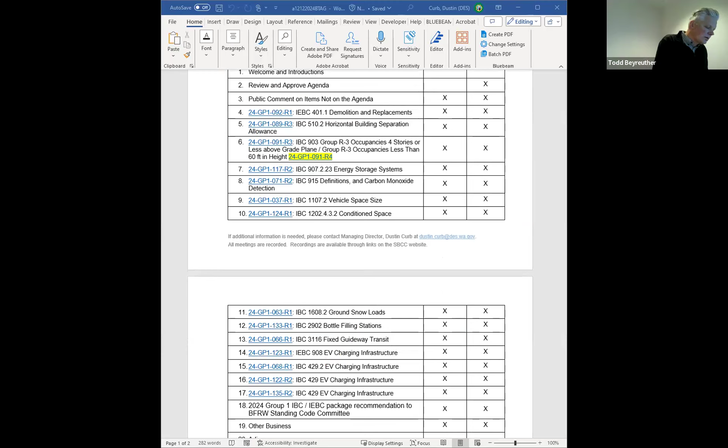Hi, thank you very much. Kathleen Petrie, King County, I'll be tag teaming again today with Ross. One thing I wanted to share is that we submitted the revisions to our EV proposal for IEBC number 123 on 12/8, and it was not posted in the agenda, only the original was. So perhaps we can chat about that when the time comes. At 123, on 14. Yeah, and so we have a version of that. Yes, it was sent on Sunday, I just resent it, we didn't realize it until right before the meeting. Okay, thank you, Kathleen, we'll look at that. Thank you very much.

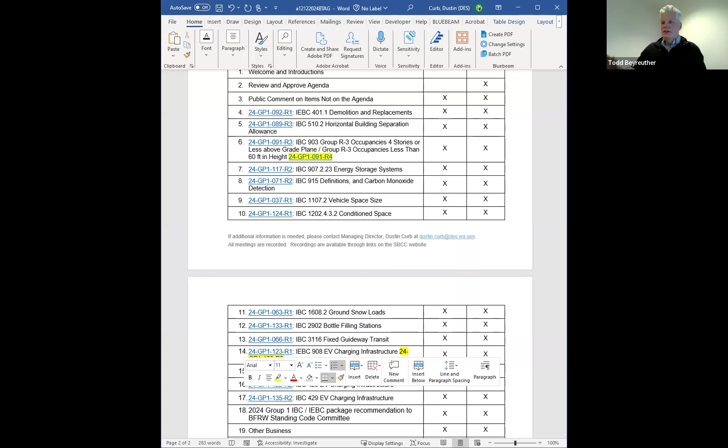Correct. And on that one for you, Todd, specifically, we made a motion to approve it, and then the intent was to bring some stuff back to chapter 35 on that one. And the motion on that one, as I have it recorded, is that we review the addition of the chapter 35 stuff at the review of the whole package. Are there any others that are in that category?

I've got one more on there. There was one that staff was asked to revise just to correct some formatting issues. Off the top of my head, I have to get in here and look at the spreadsheet. I think we can probably wait till we get there, but everyone be ready, and then that's at the will of the tag of what you want to do on any of those edits in that final package.

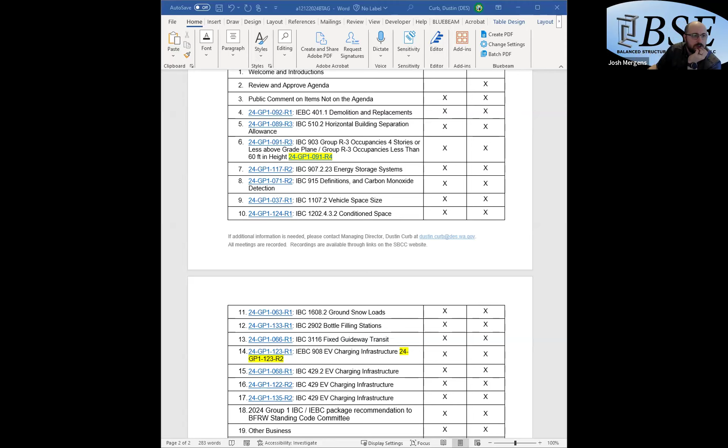There it is. So there were some questions before why we had 401.2 on here. I included it because both these provisions are in one WAC, so there's no changes to that top portion. It's just that they were both in the same WAC, so I included them in the proposal. If that's not appropriate, it can always be changed, but that answers one question.

The bigger question, though, is what was the intent of 401.4 from the original WAC, and have we really addressed anything? The main concern was we saw this language, effectively demolished by damage, and the concern was, what does that mean? What is effectively demolished? How do you enforce language like that?

So I tried to clean it up the best I can. Some folks had questions about what the intent was, and overall, the more I'm looking at it, effectively what we've done is nullified this WAC and brought it to just what the IEBC would have you do anyways. So that's starting to make me say, okay, hold on, that's just undoing the WAC. That doesn't make sense.

So what was the WAC trying to accomplish? I gotta be honest, I'm not fully figuring it out. What I think was intended is this was for the scenario some of us are familiar with, where people will demolish everything but one wall and then replace a building and say, hey, that's a remodel. There's a whole world of people doing that to get out of various requirements. And I think what they were trying to get at was, if you're doing that, the whole thing needs to meet new code, including its foundation, with an exception that the foundation could remain and be reused where approved by the code official.

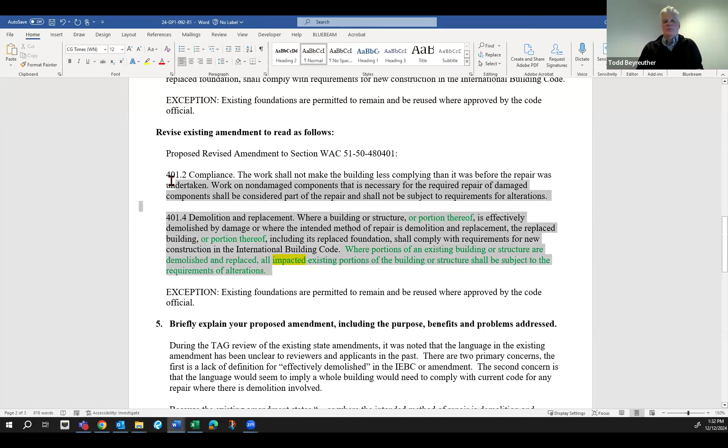So I would make the motion that we repeal the WAC language, make a reserved section, and recommend that for full adoption to the council. I second that. Okay, thank you, Josh, and then Hoyt. We'll wait for it on the screen, but any discussion on that motion?

So the motion would be to recommend this petition, as amended, shown on the screen, for adoption by the full council. I know that sounds funny, but everyone understand what we're doing? Yes, there is that exception below from Dustin too. Thank you.

Okay, so I trust Josh and Hoyt that captures your motion and second. Yes, that's correct. My motion, yeah.

Okay, go ahead, Mike. I just did a quick search back to the spreadsheet that Dustin had mentioned, and we actually did have a discussion about repealing 401.4 when we were doing the reviews of the current amendments. I know Dustin said he can't pull his up, but it looks like he has kind of a long paragraph written in that 401.4 that essentially says this WAC amendment requires compliance with building code. The quick part is it suggested repealing existing state amendments. Well, it is - I would say we've done proper public process.

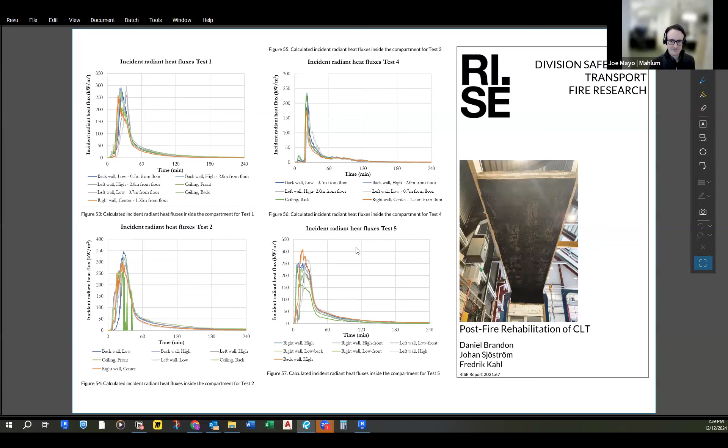As part of that study, they've actually published a post-fire rehabilitation of CLT report as well, getting at the question of what happens if there is a fire and how do you repair the CLT.

five stories with stair pressurization. You could get potentially 2 more Group R levels, or perhaps an A, B, M, R, S occupancy at the bottom. I don't think you could get more than 1 level just with the depth of mass timber structural framing. Similarly for the 3A, you could potentially get 3 additional stories, or if you're not going with Group R residential below the 3-hour horizontal assembly, probably more like 2, given the structural depth of the timber members needed.

So that was just a little background on this particular proposal. Dustin, I can pass it back to you now.

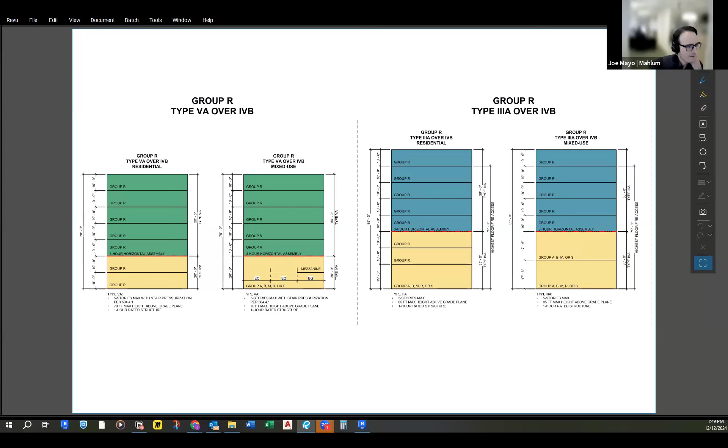I'm just bringing that up as a question, hopefully that makes sense. Yeah, that does make sense. I think we did add something in here for roofs. I want to say I might have missed it then - I read over it quickly.

So Dustin, do you want to go back to the language? Yeah, let me please stop my share.

If you scroll down, Dustin, I hope it made it back into this. Yeah, because I remember specifically thinking about that and talking about it. Did this, when this broke out into its own section, did that part not come with it? Yeah, maybe so.

It's an important point, Hoyt, that I think was intended to be included. That can get added in here if it's not already. I can't remember the discussion if, when a couple edits came from Seattle, it was determined that was unnecessary because it's already applied somewhere else, but my memory's not helping me right now. Let's come back to that and we won't forget, Hoyt.

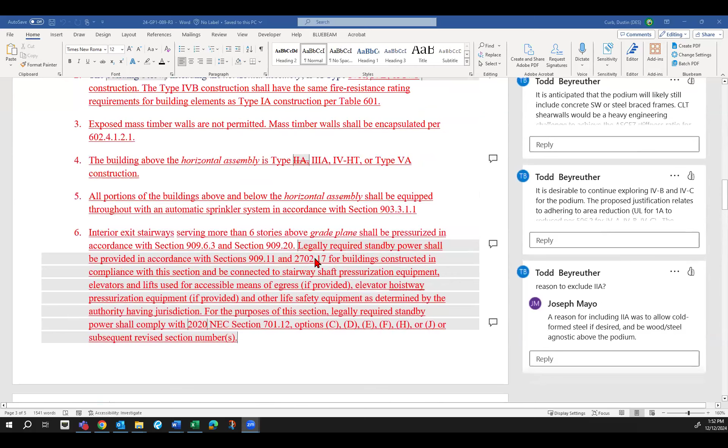The second one is the pressurized stair provision that you have in here. You have it at 6 stories. We're going to have now a pressurized stair, whereas in several other examples where we utilize the story increases, we've always kept that at above 4 stories. Granted, this is a little different, but there is type 5A construction above there, and I guess I'm slightly concerned about the idea that we have 6 stories above grade plane without having pressurization in the stairwells. So those are just 2 comments that I had to throw out there, and still say I have overall concerns about this proposal. Thank you.

Tim, if I may ask a question, can you go back down to 10, Dustin? Aren't you, so this is the same provision as the normal 510.2 with number 10 there. That's the allowable height, obviously, but you're saying you have concerns with the type 5A, 3A, or 4HT starting at that podium base at this horizontal separation, the number of stories? It's not, just to be clear, you're not saying it's not setting a type 4B number of stories on top of that podium, right? Everyone's clear on that?

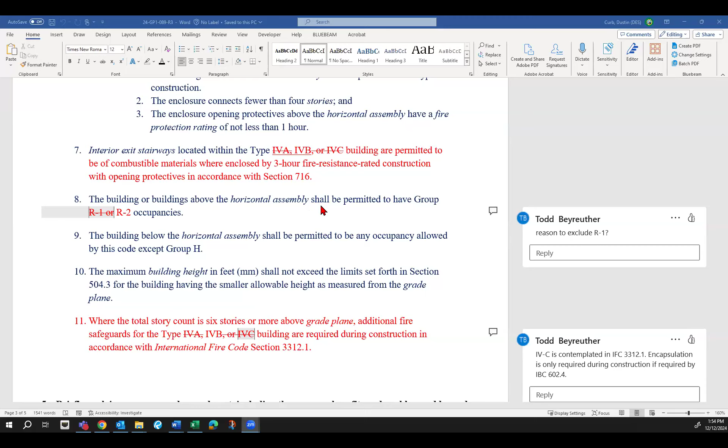Maybe I'm not clear on that. So if you go back to the very start of this proposal, it says that you can restart the stories at that horizontal separation. So now you're just saying that number 10, the building above. Right. And I asked because I was having a conversation with an architect the other day, and it got halfway through the conversation before I realized that it's not. I had to explain more clearly that the type 4B is only the bottom building, not the top building, right? Just like a normal 510.2 separation. Correct. I understand that portion of it. Okay. Yes.

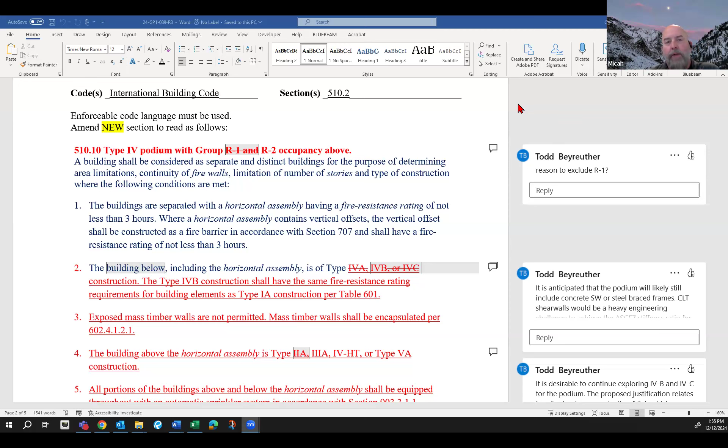Micah? Thanks as always, and appreciate everybody's work on this. I think it still has some holes. I know we're trying to get stuff pushed through and approved, or at least looked at, but maybe this is an item that needs to remain open through part of the second go round here.

A couple of things. The proposal online's kind of confusing. It of course says we're modifying 510.2, but now it's a new section of 510.10. Doesn't seem really correlated, especially with its positioning in the 510 section overall. Another part of that is, did it correlate correctly with 510.9, which talks about multiple buildings above a horizontal assembly, with these new or added provisions?

And then just on the proposal itself, again, it's repetitive compared to where 510.2 stands, and a little confusing in that. But we've got a double number 7 here, and your second number 7, if you want to scroll down a little bit. John did some review on this. Sorry, he can't be here today, but he indicates this is not necessary. You can maybe modify it, but 602.4 talks about how it's already clear that type 4 construction is not to include stick framing or FRT.

So it doesn't necessarily make sense to reduce the protection for stair enclosures. What we're getting at is that 602.4 already allows mass timber non-combustible framing. So once you eliminate all the other combustible materials in item 7, what's left is mass timber, which is already allowed. You could almost eliminate item 7 alone if you don't want to modify it. One option is to modify it to be more accurate, or eliminate it. Eliminating is probably the best choice since we all like shorter codes. But I still think there are some correlation issues with this and a lot of open questions and concerns.

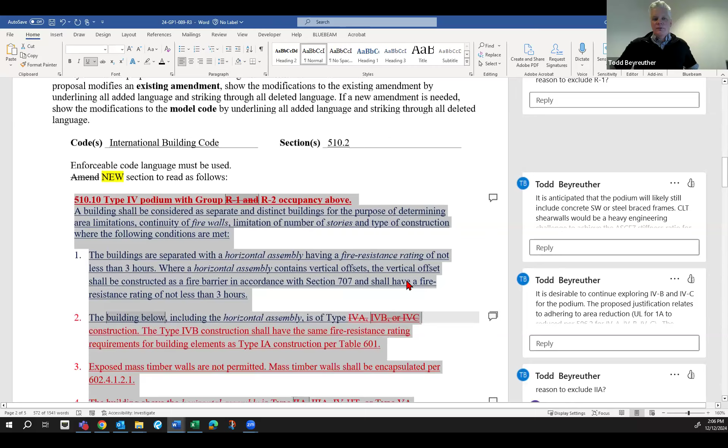We always use that informally. Hopefully it's not actually in here in that language, right? Oh, it's right there, type 4 podium. Where? 510.10. Yeah, let's cross that out then. I agree, let's cross that out. That's a good point, Ken. Thank you.

Which section needs to be crossed out here? No, just in the title that we took from a recommendation, I agree with Ken that podium, just the word podium, should be removed. I'm not the expert in code language, but for clarity, whether titles are enforceable, I think that's a valid point.

And just for clarity on this one, Joe and Todd, this language was pulled from a different section, and that's why we're showing changes here, for clarity. It was proposed that we just break it out. Remember the comment in public media, and there's an additional one in email that the exception should be longer than the actual language.

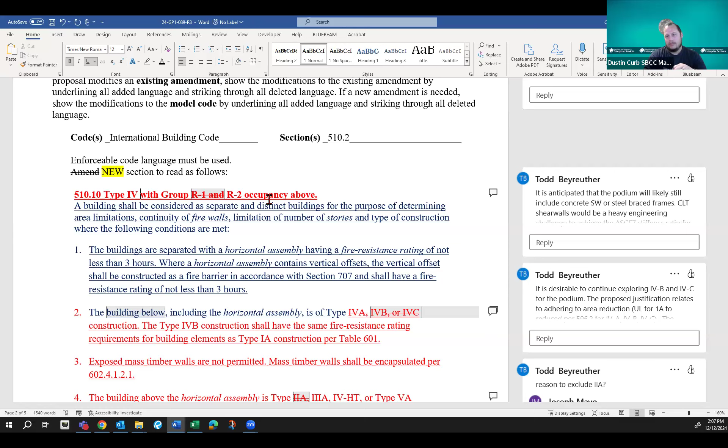So is anything shown as strikeout here that I should go ahead and remove from this proposal while we're talking about it? Yeah, you could. Remember, the whole thing of 510.10 will be a total new section. Yeah, no, these are all valid points. It's partially, this is the sausage making.

Okay, but still we need an action of something. So, Micah, I appreciate that. I don't know what our pathway is though if we don't move it forward. I guess we technically could table it, but Dustin, I don't know what process we'd be setting if we're not moving it forward in this group, to bring it back.

We are trying to close up the group, and yeah, I've been thinking about it, and we could, as a tag, not recommend this particular proposal to the committee. I don't think there's anything preventing us from taking this outside of the group 1 codes to work on a bit more outside of the timelines we're working with.

I would hope it doesn't take too much longer. I'd like to get the CR 102 drafted for the building code as one document. And if this were to hang out there until after that CR 102 is drafted and filed, there would be a little bit of a procedural issue at that point.

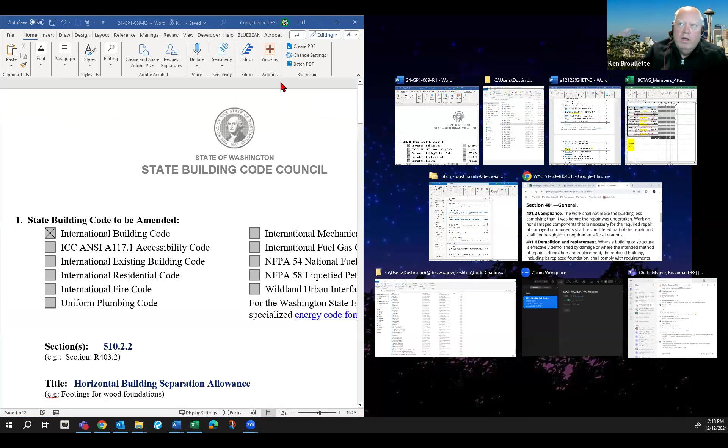Here on the left— no, I'm gonna only talk on revision 4. Okay, because I just want to bring them both up. And then on revision 4, there's one additional— I thought we caught this in the meeting, but so this proposal. Well, no, you got the wrong one up. So this one here, this is you're in 510. You want— oh, I'm sorry. Chapter 9, so, I'm sorry. There you go. Oh, I'm in number 510 for both of them. Apologies.

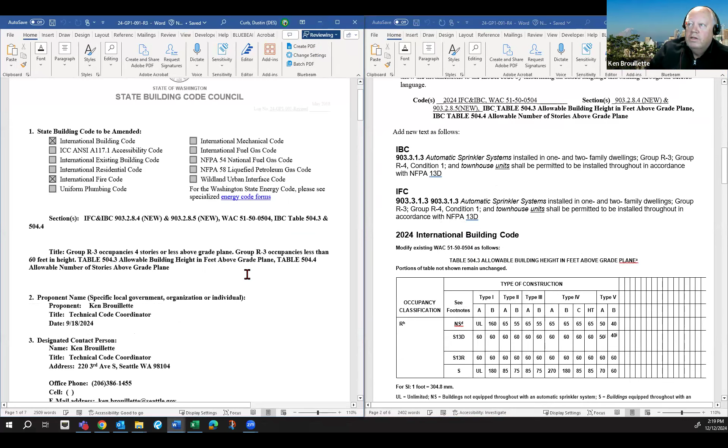Okay, so this is the one for Ken. So on the right-hand side, we have the 903.3.1.3. Can you scroll the left-hand side to the same section? I'll briefly explain what the fire code, if you can go back up to that, where it has the IBC.

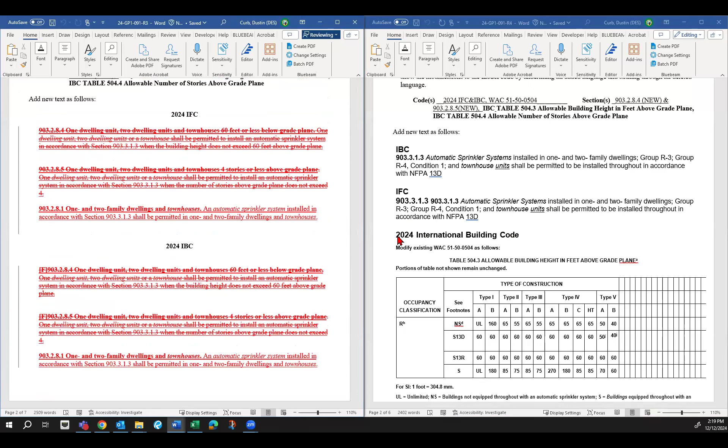So you can see what we did to the proposal is that we just concentrated and deleted out adding those additional sections 8.4, 8.5, and 8.1. We thought it was better just to look at the existing 903.3.1.3 and just make some small changes. Well, the small change was adding the word units after townhouse.

But I realized that the reprinting of this section, the 24 code says 'and townhouses.' So there's an S that needs to be shown, and then it needs to be shown struck out. So if you could do that in each one, because the 24 code has an S, and it's going to look really funny when you strike it out because it's going to look like the E is struck out too, but it really isn't. But if you could do that in both sections, that would be the minor change to that existing R4.

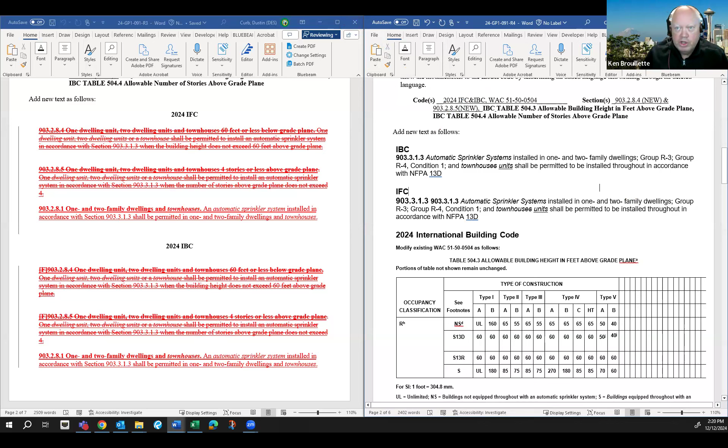And this is a clerical thing more than anything else, but the word units was just in there to clarify and to match the footnote J. So if you scroll down now to the footnote, go back up to the table a little bit. And then if you can go on the left-hand side and we'll look at the table there too.

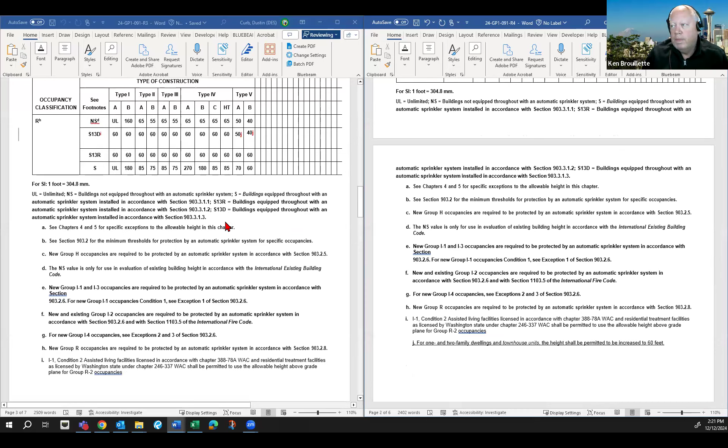And so the J got tweaked to say 'for 1 and 2 family dwellings and townhouse units' to correspond with the 903.3.1.3 change. Shall be - I'm sorry, I was reading 2 screens. For 1 and 2 family, the height shall be permitted increase to 60 feet instead of how we had it on the left-hand side with just townhouses. So we just wanted to make sure it was clarified it was townhouse units.

And then the same thing then in 504.4. Scroll down to there. So we entirely deleted out the 13D section. It was more appropriate - it was thought by everybody who was at the tag meeting and the fire code tag to just have the J footnote next to the type 5 13D system there, and then also in the R3 under type 5A and type 5B construction. And then you have the same footnote below J in that table.

And again, just changing it to for 1 and 2 family dwellings and townhouse units. And then we eliminated the section on the left-hand side that talked about fire-resistance rated construction and all those exceptions, because there's already in - and I think I still have it written down here from last week - 712.1.2, I believe is the section in the fire code or in the building code that already says that does not apply to those type of structures. So that's one reason we eliminated it.

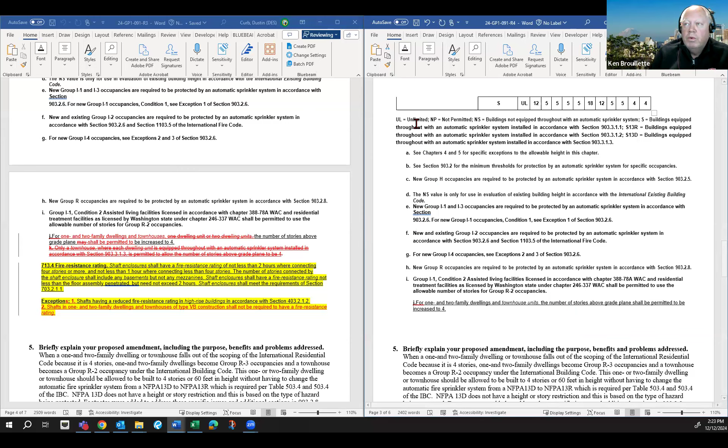So during the IFC tag meeting, it was well attended. We had SDCI, we had Ardell Jala, our building official there. Micah was there. BIAW, of course, was there, our sprinkler industry. So we went through this and approved what you see as revision 4.

With the only exception was to what we just talked about in the 903.3.1.3, by the editorial of deleting the S for townhouses and make it just say townhouse units. That was the only thing that was changed from the revision 4 that I saw, but everything else - I appreciate all the help that people put forward for this to get it through the IFC tag, and just looking for the IBC tag to correlate it so it can move forward.

Okay, thank you, Ken. We have a question from Patrick.

I was just gonna say thank you to Ken for all the work that he's put in on this and all the folks that have contributed, like Micah and other tag members. I think this is a really great proposal to address a niche case where you can have some 4-story townhouse units and lower the cost for them a little bit while maintaining good fire safety. And the fire tag already approved this, so hoping that the building tag can move this forward. Thank you. Hey, thank you, Patrick.

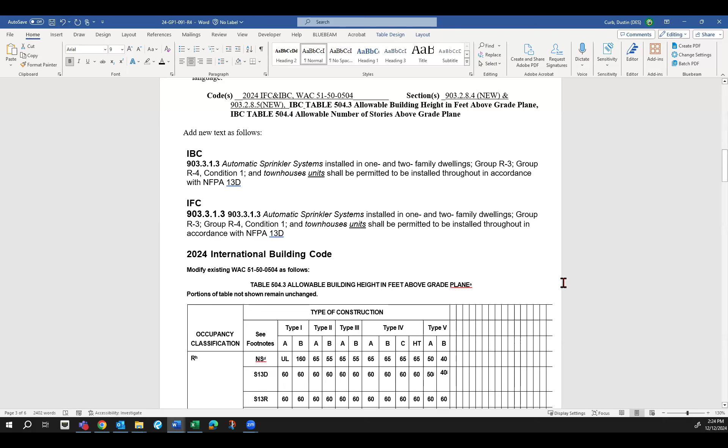Wait, no? No, I just put it down. Could you help me? You have the non-sprinkler section where you have 40, 50, 65, all that stuff.

And then you have footnote I where you go 40, 50. What is footnote I again? That's an existing state amendment I had nothing to do with. No, okay, so then J, that's the one where you're allowing it for 1 and 2 family dwelling units. Can you go back up to the table real quick?

Okay, so, why would anybody then, just asking this question here, why would anyone build a group R 13D system ever?

You mean because it's allowed? Yeah, but you could do non-sprinkler and- No, you've not got that. Look at the footnote, non-sprinkler, look at footnote D. Oh, it's only for existing buildings. Okay, gotcha. Okay, never mind.

Oh my God, I actually answered a question of Hoyt's. That's new. Normally he stumps me all the time and I'm fumbling around going, oh my God, how do I answer this question? But I got that one right. Sorry, Ken, you always get me. I always get nervous when Hoyt speaks up. I'm like, oh gosh.

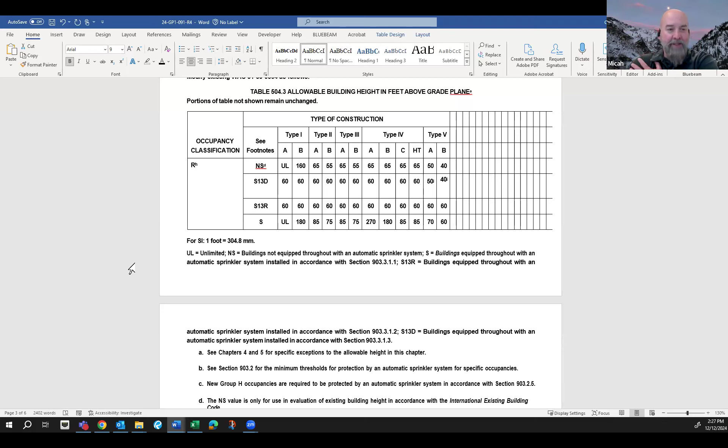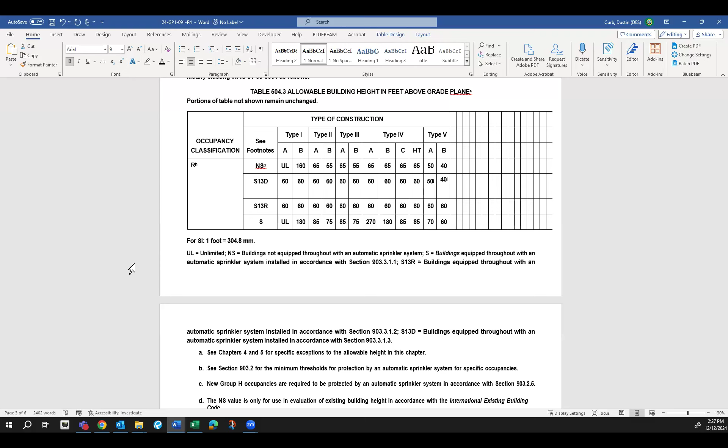Okay, thank you Micah. Okay, if there's nothing else, is there a motion? I make a motion to approve. Thank you, Mr. Hoyt. Second, Lance. Okay, thank you Lance. So it's been moved and seconded that petition 091 revision 4 as amended on the screen is recommended for approval by the full council. Any other discussion?

All those in favor signify by saying aye. Aye, aye, aye. Any opposed? Okay, with that, 091 is recommended. Thank you, Ken, and everyone else.

Agenda item 7, let's see here, it's 2:30, let's keep going. Agenda item 7 is petition 071, revision 2.

Okay, so this one also went through the fire code tag, and the fire code tag just made a change, but it doesn't affect the building code with regards to the exception, because that 1207.1 is not in the building code. 1207, I mean, the building code 1207.1, is only in the fire code.

So let me just, so I'm just trying to figure out, we got to scroll down to the building code section. And I don't think there was any change in there. I think this was more of an awareness that we took the original proposal and added in that and 855.

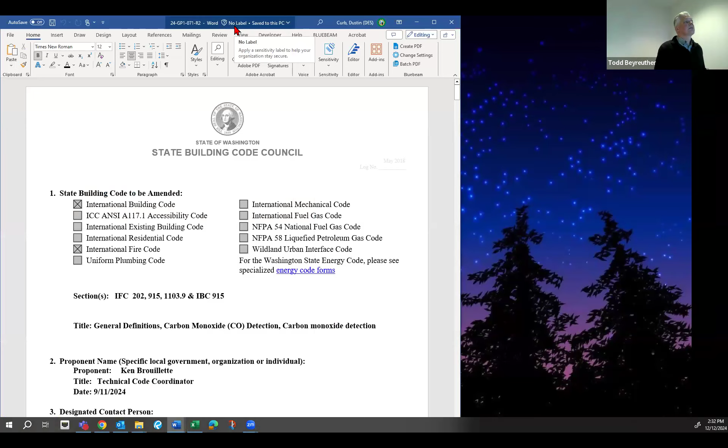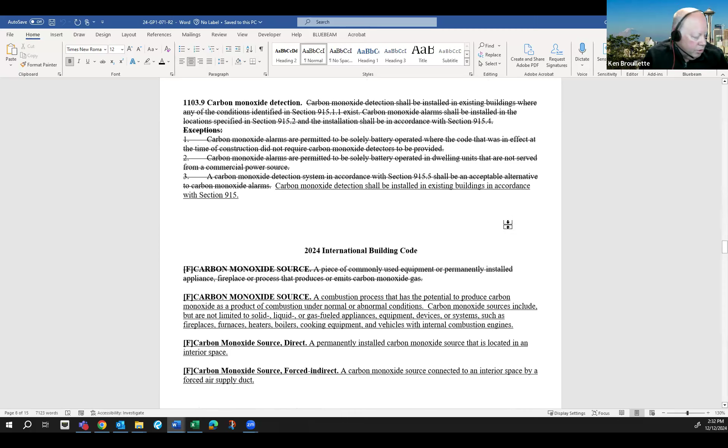This one's a Ken Brouillette one as well. So this is the carbon monoxide rewrite that was done. If you could scroll all the way down to just above number 5. This was the 2027 rewrite of this section, and Jeff Shapiro rewrote it. He was asked to rewrite it because the 24 code, as printed right now, has a lot of issues. So they decided to put together a 2027 proposal.

What we had to figure out, and John Sue helped with this at one of the tag meetings, is to look at the existing state amendment and figure out how to deal with these Group E occupancies. So what you see here is the rewrite of that section. What you don't see is there was an additional sentence that was added in that we deleted out.

I want to make sure, Dustin, it wasn't that second sentence that's showing there. This one here. Didn't we delete that at the last tag meeting? I'm just asking if anybody else remembers in attendance whether we ended up deleting that, for clarification.

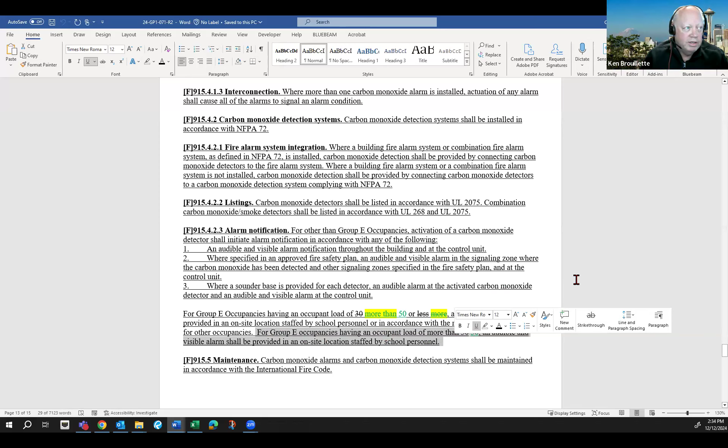I don't think so, because this is my most current revision on this one, but I can dig into it a little bit. Yeah, if we can look at revision 1, maybe. I just want to make sure.

Revision 1. I have that there, and then I have the language by John Sue here. Let me see if that matches.

So I don't know if this actually got struck out and approved at the fire code tag. I'd have to go back and watch that meeting, because when we make these modifications, you see me saving as a new revision on the fly right there. So I don't have a revision saved that has this sentence struck out.

So can I ask this of the chair? Can we table this? Since I don't have anything else to present, I'd like to be able to review that meeting and see if we did delete that section or not, and then maybe we can come back to it.

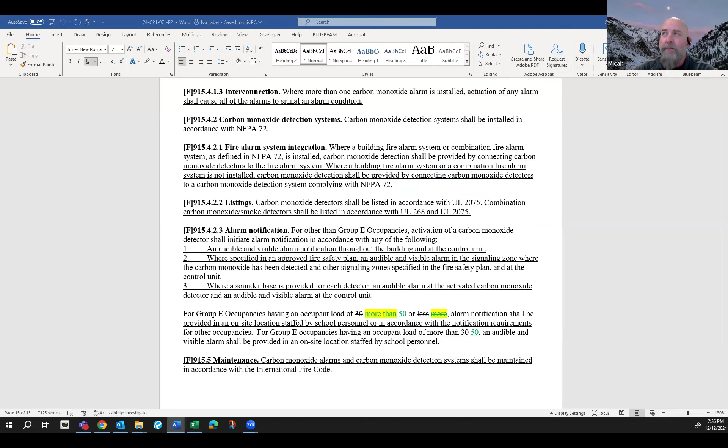It's really long and wordy. I mean, if we're going to adopt this early, maybe we should make it better. My question was about the first sentence of the definition. Again, I don't have anything to say about John's revision—John's probably 100% accurate. But when we talk about the definition, it's a combustion process that has the potential to produce carbon monoxide as a product of combustion under normal or abnormal conditions.

It's really long and wordy. My question is, is there anything other than normal or abnormal? Or, I remember you talking about this one, Micah—is there any other kind of combustion? Should it just be combustion? Should it just be a product of combustion?

Yeah, I got no problem tweaking that to make it more sense, but somebody more intelligent than me put the language together. I don't know, Jeff would probably say we should have brought it up earlier, but again, it's just not a clear definition. There were some other things, but it's not that major. You want to table it, we can talk about it and come back.

I don't think there was any comments at the national level on that definition at all when it got pushed through and approved. But I would love to table it just so I can double check that second paragraph since it has to deal with the state amendment.

Do we need a formal action to table it and move it before or after agenda item 17? Or can we just, procedurally, move on with it and bring it back? And Ken, when you're ready. That's a good plan. I'll share my screen and show the video once I get to that point. Okay, let's just pause on that one, that'll be my technical term.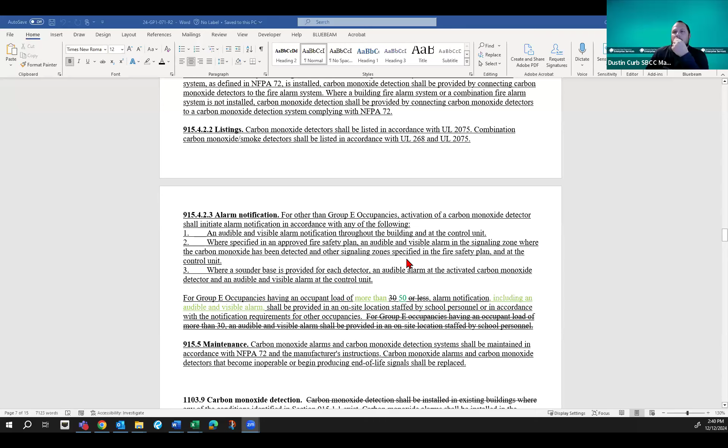So what I show here, this is the same document we just had up, but these are the sections within the fire code, and they're the same in the fire code versus the building code. Is that an accurate statement, Ken? Yeah, 915.4.2.3 is the section I was showing also. And so it shows that deleted.

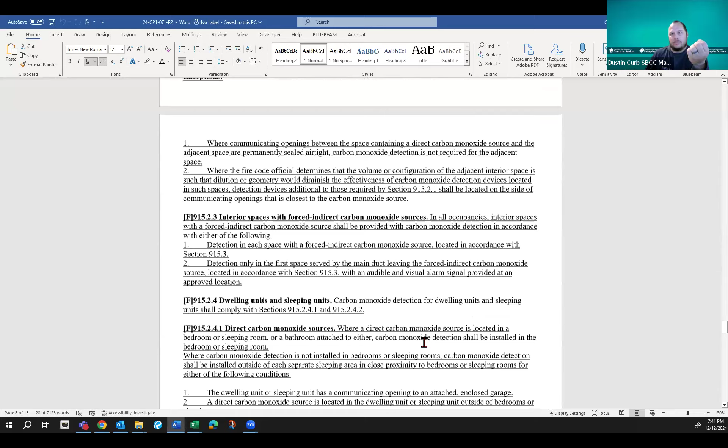Then scrolling down, we were looking at the section right above the exception statement, and that second sentence wasn't struck here. Yeah, and it should be, because it's the fire, same section. So when you were speaking about it, it rang a bell, but I didn't remember that we had a duplicate section here. So if we show strikeout, that will align with what was adopted in the fire code. Okay, thank you, good catch.

Okay, was there anything else on this proposal? Go ahead, Micah. Since we're talking about this proposal, coming back to it, question Ken, is the intent of 915 of the fire code to apply to 1 and 2 family dwellings? Let me go back up.

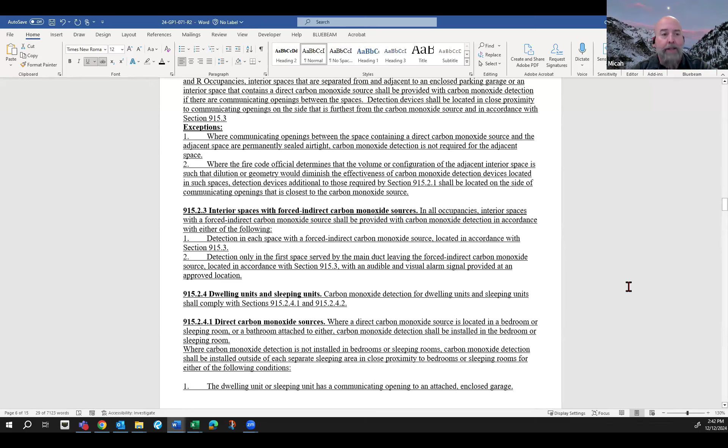I don't think there's anything, and I would just double check. I don't think anything is referenced for 1 and 2 family dwellings in here, because if they're built, I don't think there's anything that says, since the IRC already has their stuff for this. My question is, I don't see it there, specific to 915.2.4 that talks about dwelling units and sleeping units. As long as it doesn't apply to 1 and 2 family, because the IRC does have different requirements.

Since we still have that whole other group coming up, the IRC, that was going to be one of my goals, is to look at the IRC and see if there has to be any correlation done with this. And I haven't gone through as much of this proposal as I'd like.

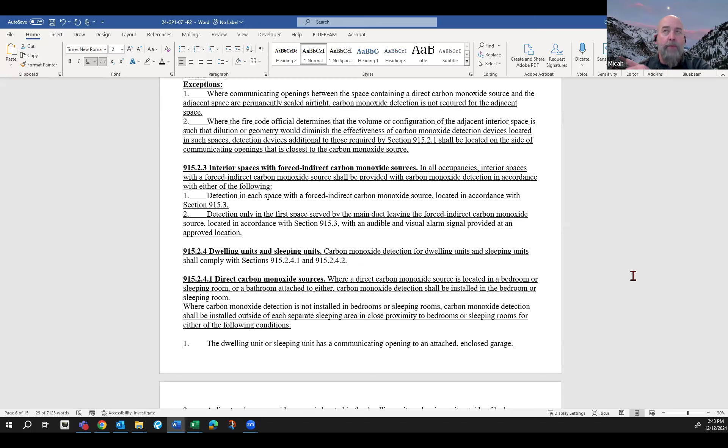Okay, wait, yeah, I was talking about Micah, and that's what I wanted, is to actually for existing buildings to install carbon monoxide ones like that. So I wanted to make sure that was caught. Hopefully nobody else's hands come up, but I don't see any. Am I correct? Because I'm ready to make a motion if I can.

I'll make a motion to move this forward to the full council. Is there a second? Do we have a second? This is Bill, I'll second it. Thank you, Bill. Okay, it's been moved and seconded that 071 revision 3, as shown on the screen. Go ahead, Tim.

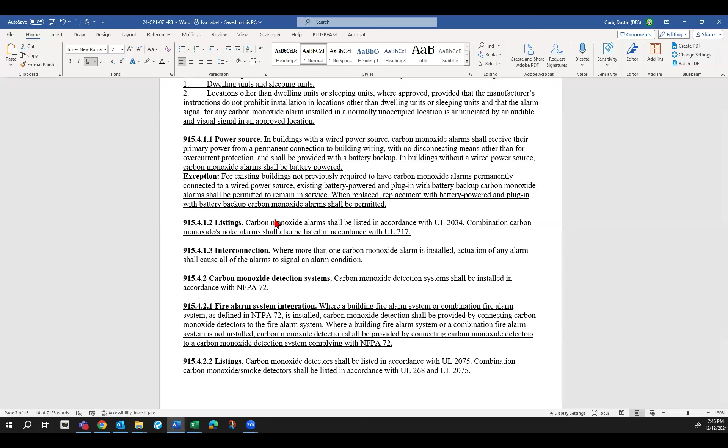Okay, go ahead, Ken. So Tim, can you explain that? Because the 1103.9 is in the fire code. So where are you seeing in the building code that it's in this proposal that it's talking about existing buildings? Because that 1103.9, it's 915.1. 915.1, okay, can you scroll up to that? Got it. So if you just wanted to, you would just strike out, you would just say new buildings shall be provided with carbon monoxide detection. Existing building code should be in the IEBC.

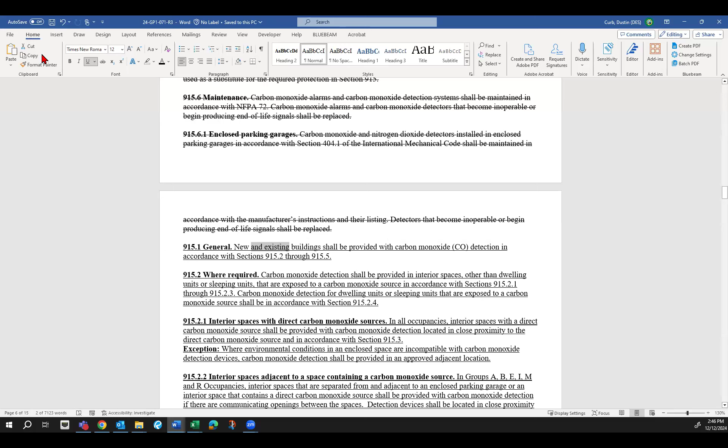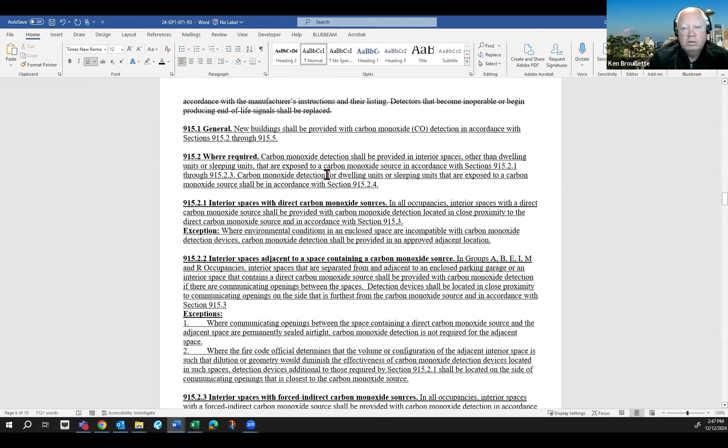Yeah, I would be fine with that strike through, because I think the fire code still would point to that and just say, hey, if you're an existing building, you got to deal with it. And I think I'm fine with that. Is there another section that's duplicated there? Yes, I'm gonna get to it here. Hoyt, do you take that as a friendly amendment? Oh, yeah, absolutely. Okay, I forget who the second was. Bill? Yes. Okay, second, thank you, Bill. Now Jeff might kill me for suggesting that, but oh well, you know, it's Washington.

We're special. Okay, now it's been moved and seconded that 071 revision 3 is as amended on the screen has been recommended for approval by the full council. Go ahead, Micah.

Ken, I got one more question on the power source correlation that you're bringing, or you're striking chapter 1103 or section 1103. I'm reading the exception for the power source for existing buildings. It doesn't seem to correlate with the current standard. The current standard said if the code in effect at the time of construction did not require carbon monoxide detectors, you could do battery operated. The new language says for existing buildings not previously required to have carbon monoxide alarms permanently connected to a wired source, existing battery powered and plug-in with battery backup alarms shall be permitted. If they're existing, you wouldn't get any new ones to be battery powered. Is that the intent? Again, it sounds like you're wanting in existing buildings, if you're going to put them in now, you have to have them wired and not battery powered.

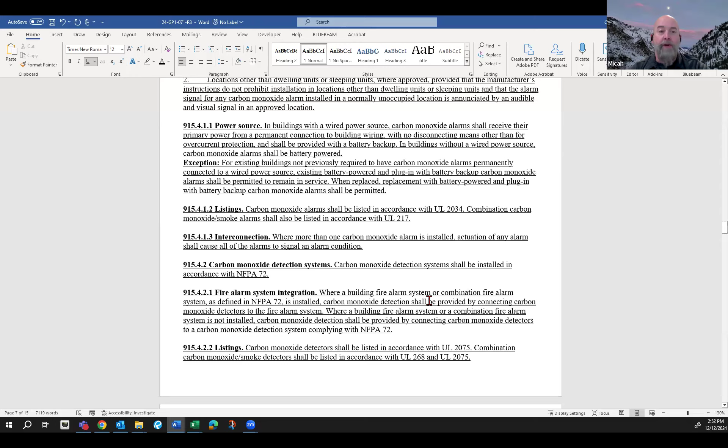This is just an exception. But if you have 1103 as currently written or proposed, 1103.9, you're striking it out and saying carbon monoxide detection shall be installed in existing buildings in accordance with section 915. That means you shall put them in existing buildings. And if I have an existing building, then I'm allowed to put in battery operated ones. And where doesn't say that?

Well, under power source, under the exception for existing buildings, if I currently... I'm not reading that the same way. And if somebody else is, let me know.

I'm reading that as if you have an existing building and you put in a new carbon monoxide detector as required by section 915, it has to be wired. It's not allowed to be battery powered.

And I don't read it that way. So, but I'm reading it like Ken's reading it for the exception.

So I'll just add that I'm also reading it like Ken's reading it for most scenarios, but picture a scenario where you add a new bedroom in, or add, I don't know, something to the requirement that's going to trigger a new carbon monoxide detector, not a replacement of an existing one, because there's no exception for existing buildings, since the exception is only if you replace an existing one.

There could be a possibility that there's a problem. In the end, I feel like that possibility is very, very slim because we only require theoretically carbon monoxide detectors outside of existing bedrooms. And theoretically, 9 times out of 10 or even 99 out of 100, it would already be in place, so you could just replace it.

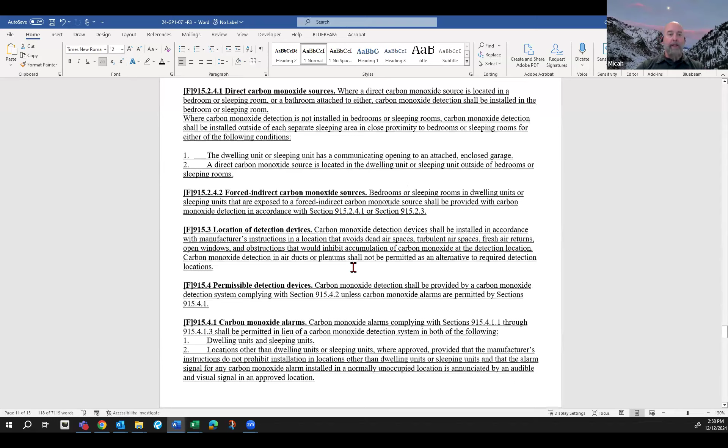Okay, Micah. Thanks, Tim, for pointing that out. This is not a building code proposal. However, the current language in the building code and the 2024 building code, 915, which is duplicative for the most part - however, 915.1 of the current building code says carbon monoxide detection shall be installed in existing buildings in accordance with Chapter 11 of the IFC. This proposal eliminates the 1103.9 and sends you to 915. So again, I think that's why it's here, is to coordinate it with the building code, and this is way beyond what the current code does today. You're going to get more existing structures having to require wired, powered carbon monoxide detectors.

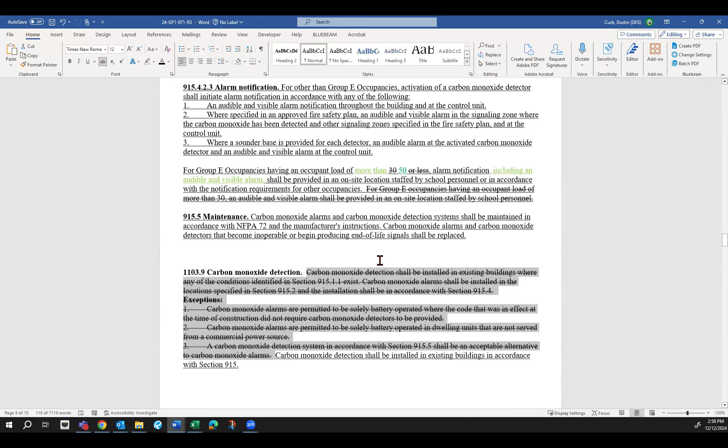Go ahead, Russell. Yeah, so when I'm looking at this, the existing building section refers back to installing it per 915, in accordance with 915. And when you go through 915, it allows for, in 915.4.1, carbon monoxide alarms, which would be the battery powered ones. So I guess I'm not seeing the issue, because it just resets it to being installed in accordance with 915, and you go through 915 and you get to the exceptions that allow for carbon monoxide alarms in place of detectors.

Okay, thank you, Russell. Hoyt. Yeah, and also when you look at the listings that have that, they have the listing ones that are not wired - they could be wireless and things like that. So I don't think we have that problem anymore. Wireless is the same as wired in our interpretation, because of the listings by UL - they have those things listed like that. So I don't think there's a problem. I don't think it'll be an interpretation problem. And I don't think they're going to make the whole house be hard-wired and stuff like that. So I don't think there's an issue.

Okay, Tim? I think it's key to point out, interconnection or interconnectivity is a separate issue versus power source. So yes, we use a lot of wireless, or not wired together, listed devices - we can use those now. But this goes back to the power source provision, so I do think there is an issue in the fire code. And I think for consistency, we still need to move forward the building code provisions. And we need to go through the public process, theoretically, at the State Building Code Council, to get that Chapter 11 in the fire code modified at this point, if that's already been recommended for approval by the council. Because otherwise we're going to run into all sorts of issues if we don't have the building code correlated to it. But I'm more understanding Micah's concern now, in cases where there's nothing there to begin with, I think.

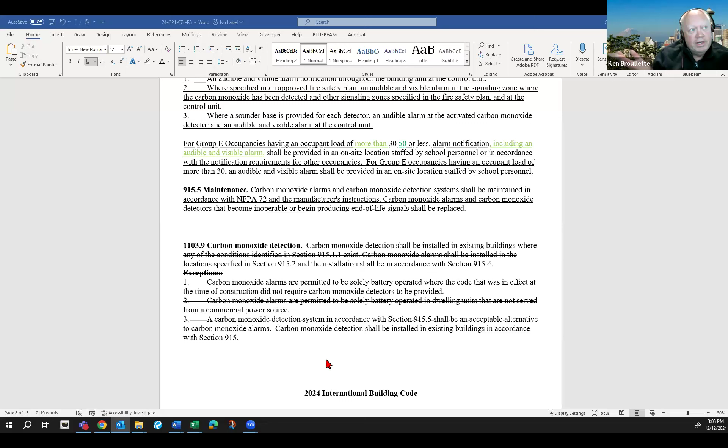For today's discussion, if we're trying to just move forward the best as we think is currently possible, if we removed the strikeout on 1103.9, then at least it's initially done, and perhaps that's what could be perfected later on. And then maybe that correlation committee can correlate, hey, the fire code tag did this, the building code tag did this, even though it's a fire code section. I don't know, go ahead Tim.

Reconvene the correlation group again. I think what they're asking for is for us to move on the building code language, and I think Ken's got a viable option for clarifying what's in 1103.9. I think Dustin just basically covered my comments. I don't think we have the authority to modify or unstrike the fire code provisions, as that is the fire code and not part of this tag. So I just think that us moving forward the building code sections with a correction, which Ken is committed to at this point, I heard him say that, then I'm all in favor.

Okay, and that'll happen tomorrow at the committee, considering the fire code. And then we have the building code next Friday at the committee level. What time's the meeting tomorrow? It's going to be at 1 o'clock. All right, I'll see if I have a couple opinions to go through first as well.

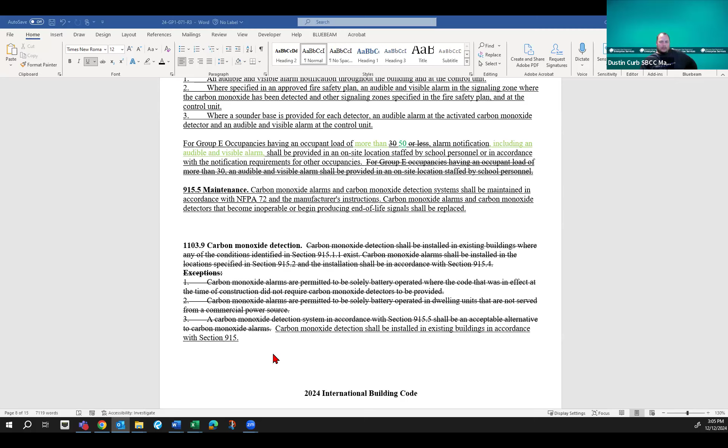So, even if it's not fixed at tomorrow's committee meeting, I think your plan of addressing it in the public comment portion is still a viable option. All right, thanks. Okay, Russell?

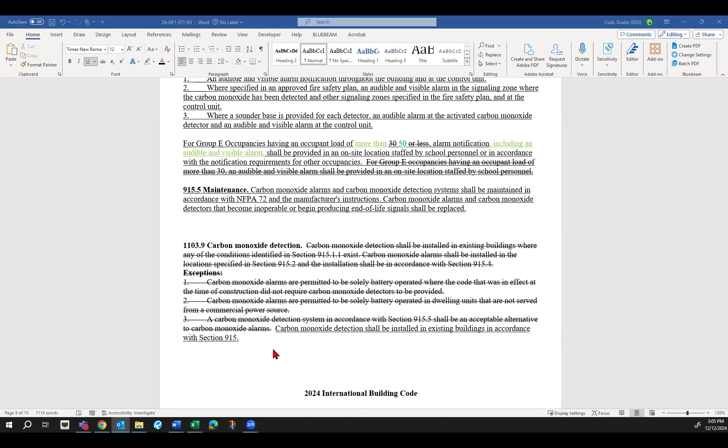That's all right. Yeah, when I spoke before, I pointed out the wrong code reference, but the 915.4.1.1 for power sources does have an exemption for existing buildings not previously required to have carbon monoxide alarms permanently connected to a wired power source, and allows for battery or plug-in. But I think that was the point of the comment that brought this whole conversation about, is that if there's no carbon monoxide detector in this specific theoretical building, if you don't have a power source, you're going to have to wire it in with a new detector.

Okay, I guess I'm for the misunderstanding or misreading that, because the way I'm reading it, it seems to me that would allow for battery or plug-in with battery backup. If you're replacing an existing one. Okay, I guess I was misunderstanding that then.

Thanks, I think there's a division of how everybody's understanding that section a little bit for sure. But that was Micah's point of contention, is that when there's an existing unit, you can replace it in kind for battery backup. But if you have to install a new one, it doesn't exempt you from having to place the circuits in there for permanent wiring.

Thanks, Tim, thank you Russell. Tim, did you lower your hand? Yeah, I think Dustin basically addressed it. It definitely says existing in that same sentence he's pointing out.

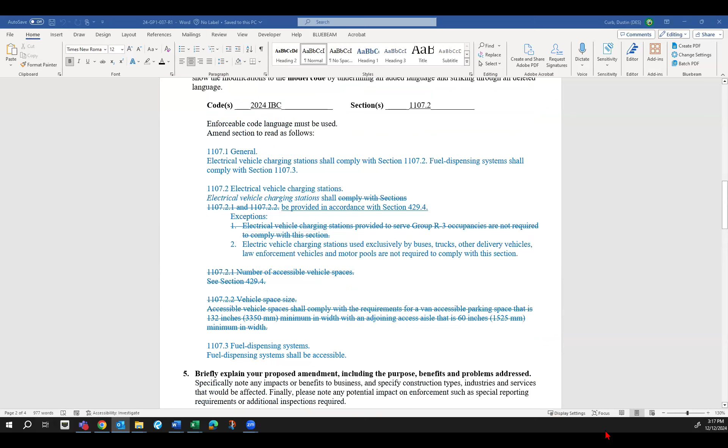This is Tim, just for discussion, can you scroll up again just to double check what we're removing? Okay, thank you, does everyone remember this? Okay, we're ready to vote. All those in favor signify by saying aye. Aye, aye, aye. Any opposed? With that, 037 is recommended for approval. Thank you.

Let's see, item 10 is then 124, revision 1.

Joe, your name's on this one. This is the conditioned space proposal. Oh, this is the one we have been talking about, should we name the codes everywhere?

Option 3 is kind of what has been identified by the correlation group as most attractive to them. I believe that in our package... let me get online real quick to see our spreadsheet. This one was voted on, I believe, to deny the petition by fire tag, and I just want to make sure I'm not misrepresenting that. Just give me 2 moments. This is 124.

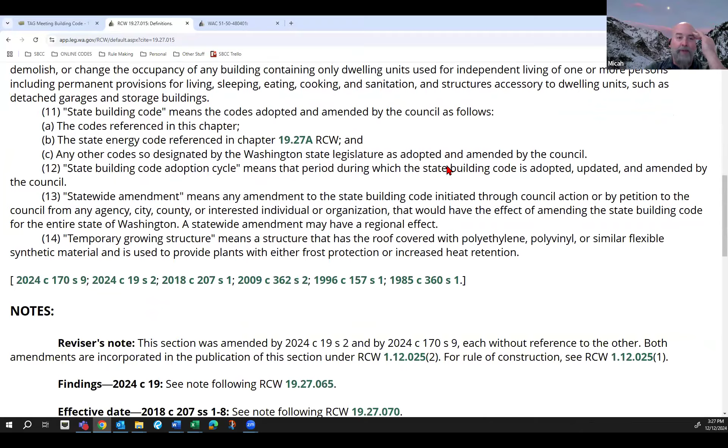Go ahead, Micah. I'll throw this out there again - RCW 19.27.015, the definitions talk about the state building code and the definitions for it, and it includes the state energy code referenced by 19.27A. If anything, I agree with Mike and others, except option 1. If anything, more than likely, we don't need it. Thanks.

Thanks, Micah. Well, I think to make Tim happy, I think we should just go ahead and deny it. Doesn't sound like it's needed, and we can go around and around - would it maybe be better to have option 1 in there? But this hasn't changed. The RCW explains it pretty darn clear.

Okay, is there consensus on that? Either deny or withdraw? I suspect so. Dustin, what's the easiest? The easiest is to withdraw. Either way, if we don't want to do a voice vote, we can just ask Joe to withdraw the proposal. Or if we're going to deny it, it's easy either way. Joe, it's up to you. Let's withdraw the proposal. Thank you.

Assuming there's no objection to that, so that means that proposal or petition 124 is withdrawn.

Agenda item 11 is petition 063, the ground snow loads, revision 1. Just finishing up the note here, one second.

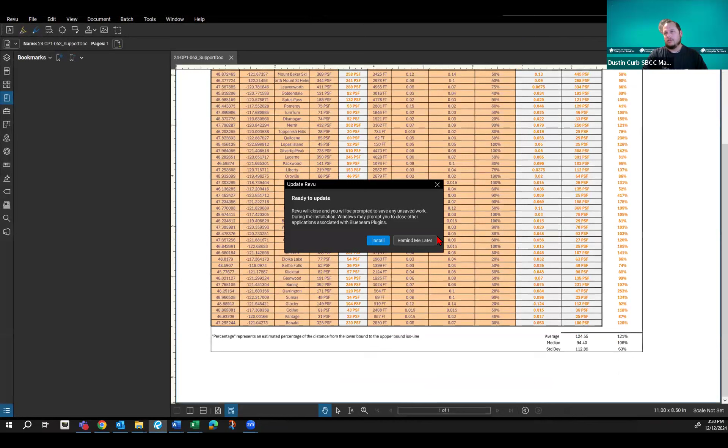Great, thank you. So we ended up agreeing on a method, but not exact numbers, and that's kind of the only thing necessary to discuss at this point. I also want to look at the snowdrift provision I put in there. Let's see, you're pulling this up - this is the document you sent over. Sure, yeah, and that was attached to the previous one as well.

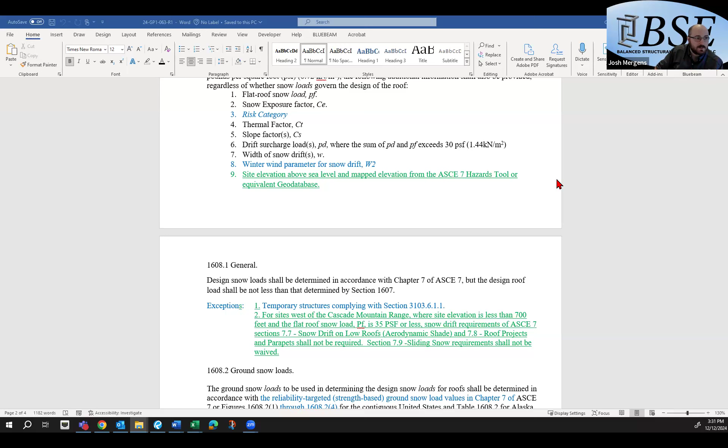Can we look at the proposal itself? Thank you, sir. Oh, I'm sorry, can you scroll down? This is the current language. Perfect, that makes more sense. So we had discussed making a couple of proposed amendments. One would be in the list of information required on structural drawings - we have green number 9 here: site elevation above sea level and mapped elevation from ASCE 7 hazards tool or equivalent geodatabase. I think we all agreed on that, but this is the first time to look at final language.

The next portion was adding an exception. 1608.1 is essentially the general overarching snow load design section, and it already has an exception for temporary structures. We would be proposing calling that number 1, and adding number 2 - this is our snow drift exception for Western Washington, where we have low snow loads, mimicking what we did with SEAW. One of the things mentioned last time was ensuring we have good delineation for sites west of the Cascade Mountain Range. I went ahead and added where site elevation is less than 700 feet. We had talked about whether that should be 700 or 500.

Digging through the SEAW, they had a couple different provisions. One was where snow was 25 PSF for the roof or less, or some jurisdictions said under 700. I went ahead and threw both at it. Now I just said 25, and you may be looking at the screen saying, hey, that says 35. That's because that would be the equivalent snow load, or actually a little more conservative than equivalent when we move over to the new risk targeted approach for ground snow loads.

So this green chunk is just pulling forward what we already did from the SEAW, where we were neglecting snow drifts in areas that don't really experience snow drift. I think the elevation combined with west of the Cascade Mountain Range, make sure we're definitely far enough west, and there's no debate on where the line of the range is, because certainly it's higher than 700 feet.

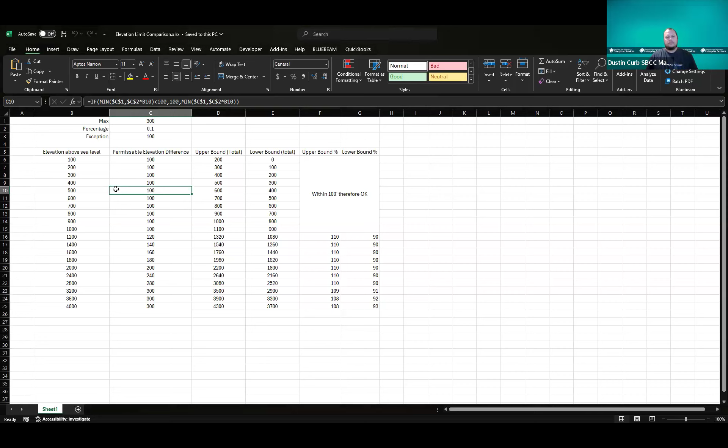All right, we all see my Excel sheet? Yes, sir. Perfect. So what I did is I essentially had a maximum difference, that was, we were saying if it exceeds 300 foot, meaning the site elevation was greater than 300 foot of the mapped elevation, the 10% percentage option and the exception for 100 foot, and just kind of looked at how all of these came out elevation wise.

When I put in the original 500 and 15%, we were starting to get things where if you're almost 2,800 feet, 2,400 seemed appropriate. That felt like a stretch to me. I'm proposing this 300-foot and 10%. It keeps all elevations, of course, within 10%, and in very high elevations, it starts to become less generous, which I think makes sense.

I'm making this section up entirely, so I'm very open to conversation, but we need something to bracket in a reasonable amount of values that we can say, hey, that's something that you need to talk to your building department about and get confirmed. So I think that's kind of my whole presentation on it. If anyone wants me to flutter numbers in this sheet, I'm happy to do it to see what it does. If we want to look at the language a little bit closer and make sure we have that ironed out, great. But I think we're generally in agreement on direction. It's just making sure we get the right language and approach.

Do you think you could zoom that sheet in just a little bit? Oh, sure. Sorry, on my monitor, it doesn't look so small, but I see how it would be on your end. Is that a little bit better, Dustin? Way better. Okay, great. And I'll scroll down to the meat of it that doesn't have our 300-foot, 10% up there. And Roger, I see you got your hand up.

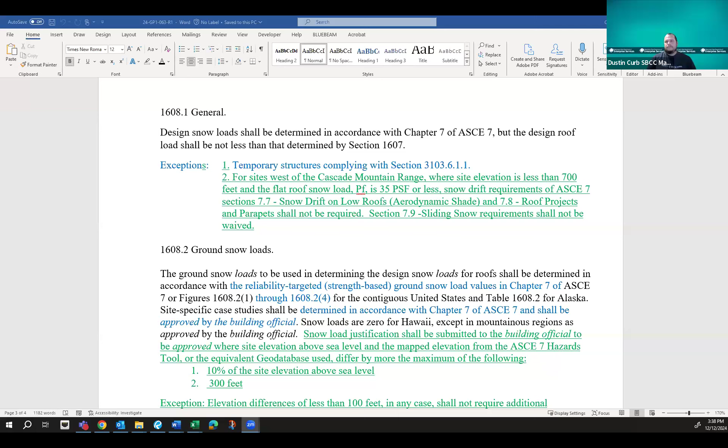Yeah, thank you. So exception 2, which I think is great to have a number for west of the Cascade Mountains — so you took the 25 and divided it by 0.7, and that's how you got the 35, I'm assuming. But the question I have is that before, in the 21 code or ASCE 7-16, we have an importance factor that we're losing. So what, are we going to allow this 35 regardless of the importance factor, or the risk category?

Yes, it is a good point. So to dig into that a little bit more, what we actually did is we took a ground snow load of 20 PSF, because I know the previous recommendation was for roof snow loads of 25 from the SEAW white paper. However, we're comparing ground snow loads now, and most of those 25s actually had a ground of only 20, so I wanted to keep that apples to apples. Julius had pointed out at one point that there's some commentary in the ASCE that we can't simply divide by 0.7, because it ranges between 1.4 to 1.6 to get to a risk targeted approach.

So as a recommendation, multiply by 1.6. I know that's subtle, but it does raise it a little bit more. So basically what we've done is we took a 20 PSF ground snow load times 1.6, gets us 32 PSF, and I rounded up to 35. Maybe we should be rounding it down to 30.

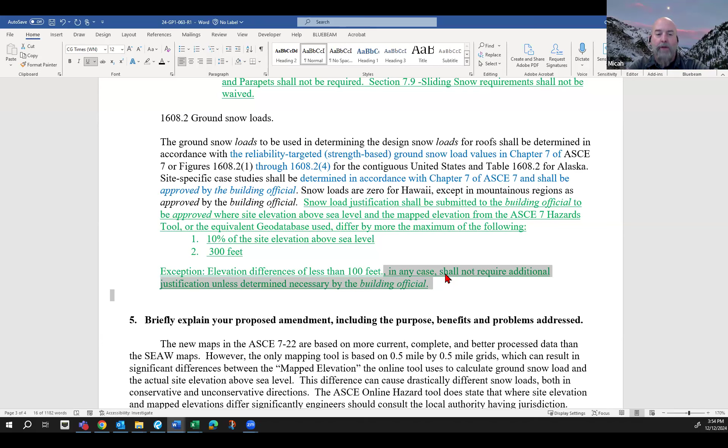But again, are you in 1608.2 requiring the maximum of the following? Is it both or one? To me, not thinking technical code language, when you say 'of the following,' that's obviously including the following. But if we need to say 'both of the following,' let's throw the word 'both' in there and move on.

It's the lawyer language stuff that I'm less familiar with, so I'm definitely on board putting it in there. It seems pretty obvious, but I know someday when somebody goes to argue it, then here we are. So yeah, I would agree with cutting off what's highlighted on the screen right now and saying 'both of the following.' I think obviously it's intended to be both, but to make sure there's good charging language, let's get 'both' in there.

Thank you, Micah. Is there other items? I'm not trying to dismiss it, if there's other things I'd like to hear. No, it's fine. The other justification language, you could put substantiating data. I mean, that's what you're providing to the code official.

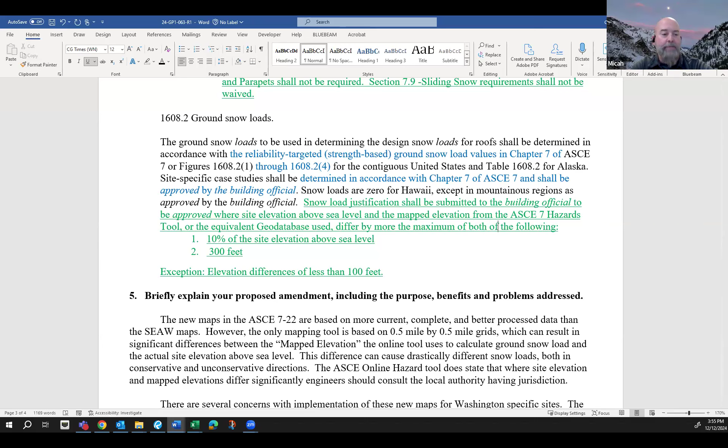Is that a consistent defined term? It's not, but it is consistent with other sections of the code, including chapter 16. So theoretically it wouldn't be italicized, but it would be consistent. If you do a search of 'justification' in the code, it comes up one time, but 'substantiating data' comes up multiple times, including in chapter 16. Then by all means, I think that makes sense to replace the word justification with substantiating data.

Substantiating data for snow load shall be submitted, I suppose. Is that appropriate then?

Sure, again you don't have to change anything. I'm just making recommendations. Well, I'm open to them because, like I said, this is the first round on the tag. So these are learning experiences, especially when it comes to writing the language. Those are appreciated things, and I want to make sure we don't create challenges in the future just due to my naivety with this.

That is the correct code language. Just to let you know, Micah had it right. So perfect, it's already in the very beginning. It's already approved by the building officials.

And does that think it should be substantiating data for ground snow load? Is that better, everyone? Since the whole section's ground snow load, I don't really think it's necessary, but...

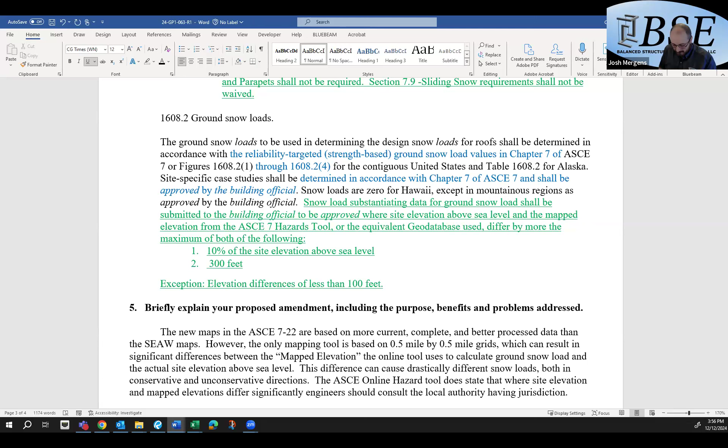I'll just jump into something that Micah said earlier, but the reason why I was raising my hand to begin with - first off, I think overall structurally this looks great. I think everything's moving along as it probably should. But that last section 7.9 in exception 2 of 1608.1, I just think that's best served just being removed.

Anytime you reference things in certain cases, it kind of draws attention to them when maybe you don't need to, right? So for me, it's drawing attention to something saying that these can't be waived. But why are we saying that to begin with when it was never approved to be waived?

So, well, I'll tell you where my thought came from. Let's delete it. It's canned, it's gone, it's done. I don't want it anymore.

But the reason is, I can tell you that most structural engineers lump those sections together, and there would likely be misinterpretations from that. But is it our job to write code language to make sure people follow the code correctly, or is it our job to write the code language such that it's enforceable? I think it's the latter, so I'm on board.

Thanks. Okay, Julius. Sorry Josh, I was just reviewing this on the fly.

On exception 2, just to stay in the essence of the white paper - because you developed exception 2 based on the white paper, right? I believe there should be a minimum roof snow load for a drift to be waived. Like in the past for the white paper, you have a minimum 25 PSF design roof snow load. So if we convert it in this case for strength, they should design it for a 40 PSF roof snow load.

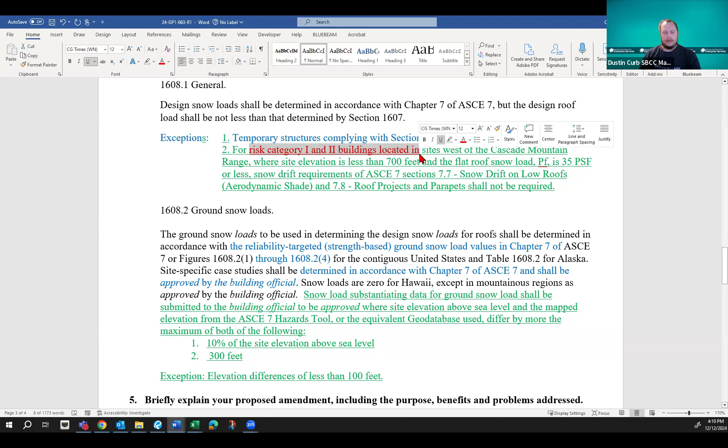Yeah, there you go. And then cross out the 7.9. I think most of us agree on that. Getting down to 1608.2.

The green sentence should start rather than snow load, it should be substantiating data for snow load, at the beginning of the sentence. I actually think it should come before snow load, but that's fine. Substantiating data, and you've had for ground snow load, and that got added in there, but okay. I think that's fine. Substantiating data for ground snow load shall be submitted to the building official.

I think we can get rid of 'to be approved.' I think that's covered elsewhere. Yeah, I think you can get rid of that.

And then, I'm not sure about the exception. I think I'm fine having the exception the way you've got it there.

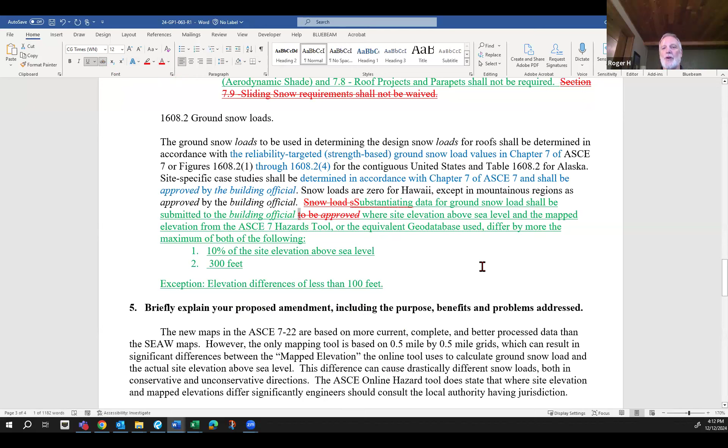So there was a change to the exception as far as what we've added. You got rid of some of that stuff, Dustin, but I think that's fine. So I believe what we've got there captures most of what everybody's talked about here. But I will turn it back over for other comments.

Yeah, I would suggest even more cleaning up of exception 2 by just saying snow drift requirements of ASCE 7, and then cross out section 7.7 and section 7.8 and all the rest there, because as you mentioned snow drift requirement of ASCE 7, I think that's enough.

My only thing I'll throw out there—that's how I had it originally written, so I tend to agree—except that 7.8, and I have the ASCE open so I'm going to check here, it does not have the word drift in there at all. It's not under the drift section. It's called roof projections and parapets.

They relate to drifting snow loads, but I was concerned that if you say drifts are not required, we have 7.7 drifts on lower roof, and there's nothing in the code that I could see that lumps all these together as 'these are drift or not drift.' It's a word we use more colloquially, kind of like the podium conversation earlier.

Unless there's something I'm missing, because I prefer the code language you're proposing, Natalie, I think that would be much cleaner, except roof projections and parapets are not drifts per se. Well, the first sentence—I mean I haven't read the whole thing—but the word drift is mentioned in 7.8 of ASCE 7-22.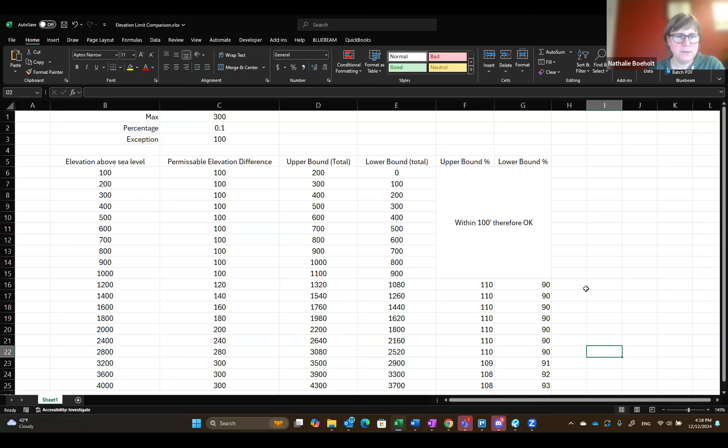Okay, thank you. And maybe real quick for the group. Oh sorry, Tom, may I say one more thing?

Just real quick for the group, I want to point out the goal of this is not to lower snow loads, it's to ensure we don't accidentally lower snow loads significantly. I want to make sure people don't think we're trying to avoid these new ASCE snow loads because they're too high. No, we're saying sometimes the tool reports grossly under-designed snow loads, and we want to make sure roofs don't collapse. Makes sense.

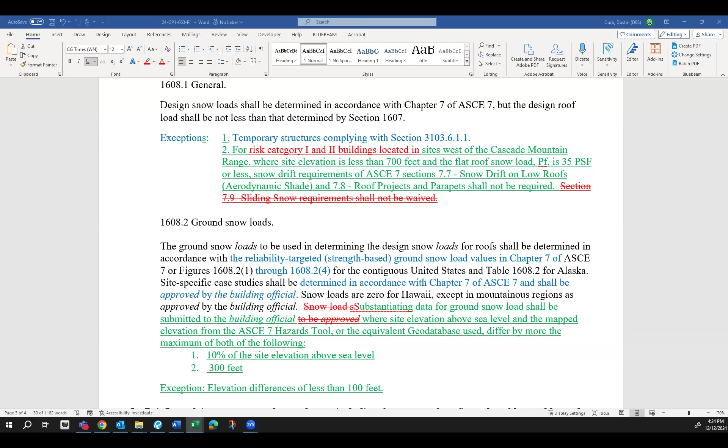I feel like there's been plenty of discussion and back and forth, and at this point, just to see where it goes, I'd be willing to make a motion to approve this as modified on the screen to the full council. Second. Thank you. Tim, and then Hoyt seconded. Is there any other discussion?

Okay, with that, it's been moved and seconded that petition 063 — correct, this will be called revision 2 as shown on the screen — is recommended for approval by the council. All those in favor signify by saying aye. Aye, aye, aye, aye. Is there any opposed?

Okay, with that, we're moving 063 is recommended for approval. Okay, that was a big one.

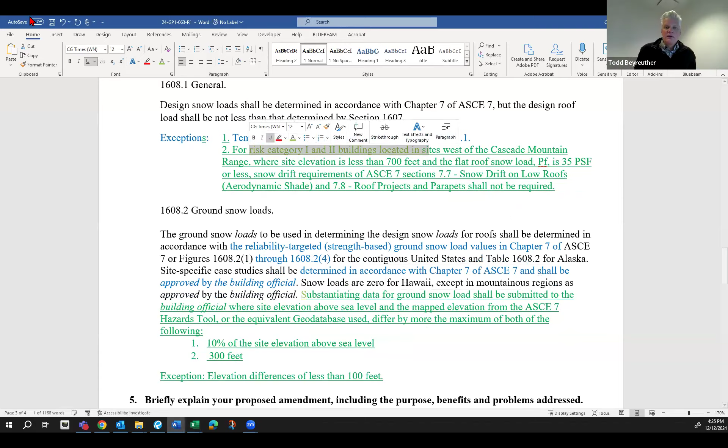Thank you all. So as we go into our next one here, which is bottle filling, we are going to run out of time. I don't think we should move into extensions today. Let's leave at least 5 minutes at the end to all agree and shake hands on when we're going to come back and wrap up the last few and then move the package forward. But let's keep going. Agenda item 12 is 133. See how far we get.

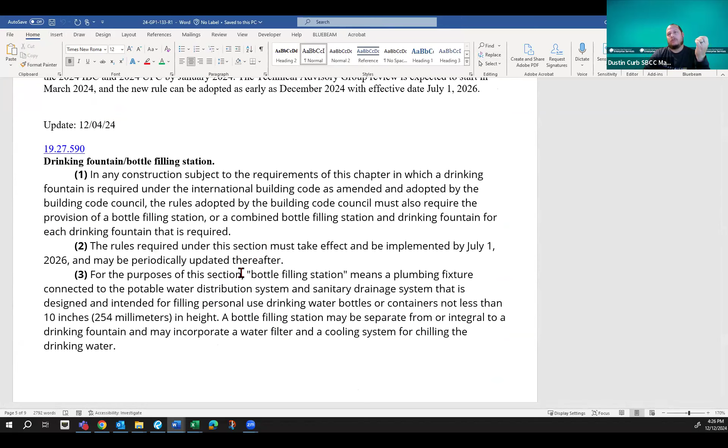All right, so on this one, in 2023 there was a bill put forward. I tried to bring this in earlier, but I had it drafted against 2021 code language. So the bill number is 1085, and it essentially, without reading the RCW, says anywhere a drinking fountain is required under the International Building Code, it's calling for the provision of a bottle filling station. In my original one, I had it drafted for the 2021 code language.

And I've gone through my edits here. I'm showing the existing amendments here in green for 2021. And then we get down to our 2024 code language, and suggested modifications are shown in red with the existing state amendment language shown in green. My tactic for identifying the locations for this amendment is to find everywhere in the building code where drinking fountains were mentioned.

Okay, so anyway, anywhere drinking fountains were mentioned in the building code, I went in and tried to identify places for bottle filling stations. So in 1110.7, just adding the words 'and bottle filling stations' to this section. And you'll notice here where I crossed out drinking fountains, because we're talking about more than just drinking fountains now. I struck that out and used the term fixtures.

Similar modification to 1110.7.1, just expanded the words drinking fountains to include 'and bottle filling stations.' And 1110.7.2, similar stuff going on here, where we're talking about both drinking fountains and bottle filling stations, I'm replacing with the term fixtures. For the exceptions, I just did the same thing, added 'and bottle filling stations' where drinking fountains are mentioned.

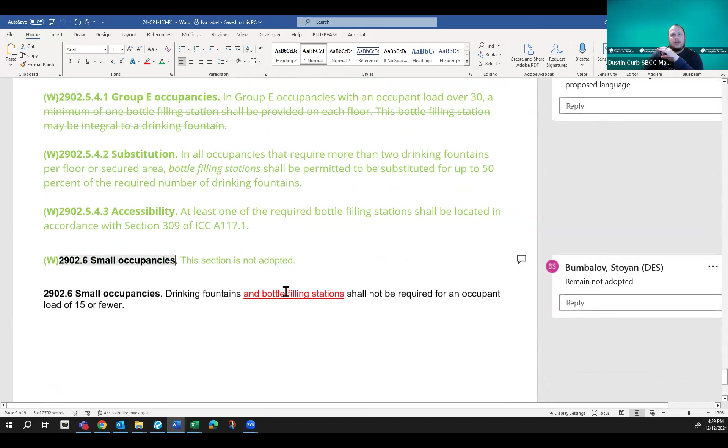I struck 2902.5.4.1 because it's no longer just group E occupancies, it's all occupancies. And same thing for 2902.6, just added 'and bottle filling stations' in there. So this one was drafted quite a while ago, made some revisions to make it for the 2024 language. And that is my quick and dirty intro to that.

And Tim, you have a comment? Yeah, in general, I think my comment is we should strike, or not change anything in chapter 11. That's the accessibility section. There's already a provision that says when you install them, they need to be accessible. So that covers everything we need to be changed in chapter 11.

With that said, if we decide we need to still do changes, if you scroll up a little further, where it gets into when 2 are required, minimum number - obviously you did a search for drinking fountain and added 'and bottle filling stations,' but in 1110.7.1, you would now be essentially requiring 2 bottle filling stations, because one would be accessible and one would be for standing persons. So what is that distance? There isn't one. The only thing defined for standing persons is your spout height for drinking fountains.

So again, in general, I think we can do away with any changes to chapter 11 and only make the changes to chapter 29. And I agree with all those changes you did in there. So that would be my 2 cents.

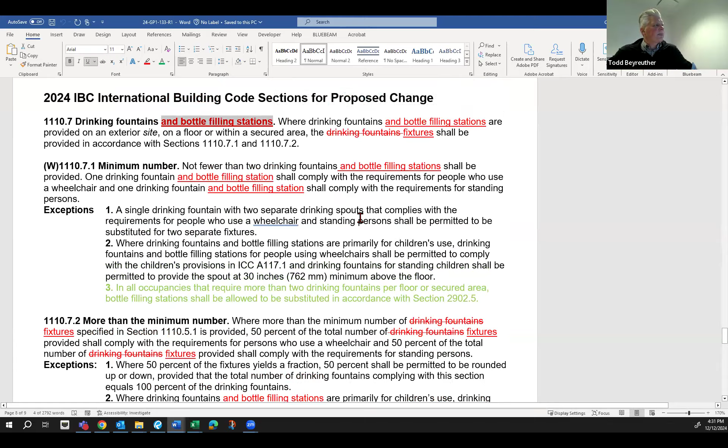As you're doing that, did you accidentally strike the charging language down at the bottom? It says through 5.4.3, but down below we didn't strike it. Is that your intention? Oh, I probably didn't adjust numbering in here. I did strike that one on purpose, but in my reading, I think these are still required, I just didn't get them renumbered. So is it better to keep the charging language and just go 4.1 to 4.2 and change the numbering? I would agree with that.

Anyone else disagree? I would point out that if we don't have the charging language, we'd be allowing substitution for all occupancies, where currently it appears substitution is only allowed for group E occupancies. Am I right on that, or how am I reading this wrong? So you're arguing to also include the charging language and then just change the numbering? Correct.

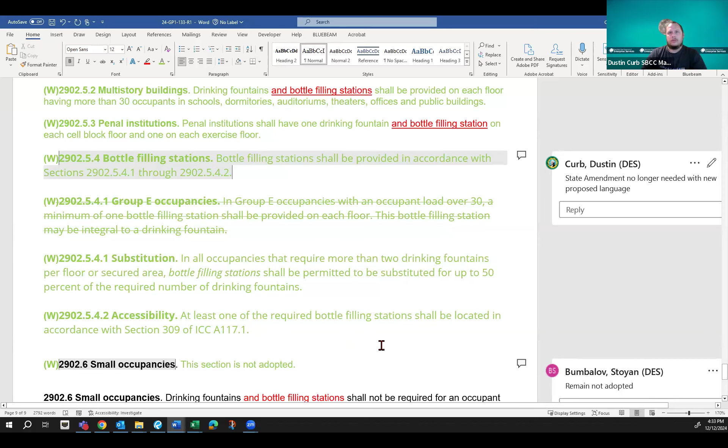Does that look preferable, Todd? I think that's right. Okay, and then getting back into 11, I'll just get through striking all this. Well, we're not going to touch 11 at all then, right, is that what you're saying? Correct.

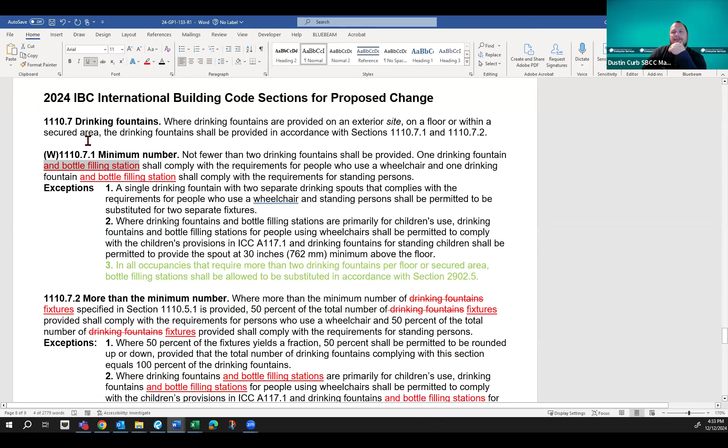Is that what you meant, Tim, and Hoyt? Yeah, so I don't know if it's easier, Dustin, but you could almost just delete all of it from the proposal, since we're not making changes. Well, yeah, we can delete anything - all you have to do is just delete everything you have written in red. Everyone understanding that? Okay, I think that makes sense.

Are we ready for a motion then? Yeah, I make a motion to approve as amended by Dustin. I'll second, this is Tim. Okay, Hoyt then Tim, any other discussion? It's been moved and seconded that petition 133, revision 1 as shown on screen, has been recommended for approval by the full council.

All those in favor signify by saying aye. Aye, aye. Any opposed? Okay, with that, then 133 is recommended.

We'll keep pushing. Agenda item 13 is petition 066 revision 1. This one is for the guideway transit. Sound Transit took back the comments from the TAG and made some changes here as identified, and it looks like these are the changes highlighted. I'm not sure if I've seen Sound Transit here on the meeting today. Yeah, I'm here today, it's Mark Murray. Gotcha, Mark, would you like to talk on this one?

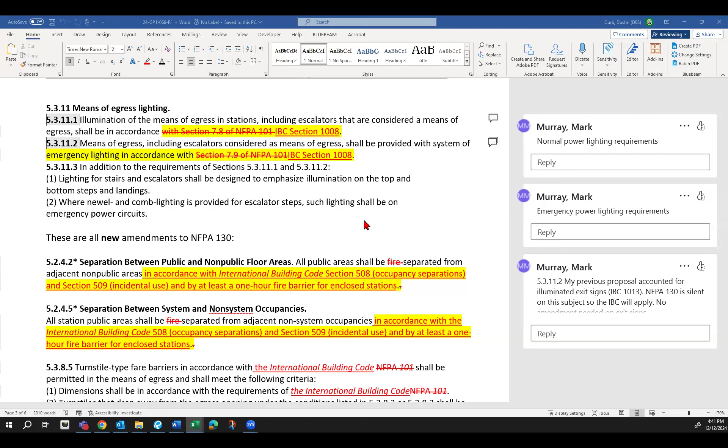Okay, sorry, let's get back. So working through this in my head, and this is always a problem when you're modifying things on the fly, so hopefully other people are following. Dustin, maybe you can put it on the screen: 'separated from adjacent non-public areas when required by International Building Code Section 508 and 509.' Everything else stays the same, but after 'non-public areas,' put 'when required.' Is it in the 5245 section here? It's in that section and in the section above. Okay, so it'd be the same for both for the change.

Right, so bear with me, I think that would make it worse. I think the current language already says what he's trying to say by making it in accordance with the code, or at least by 1 hour if that's what they're trying to do. I think if you start adding that other language, it messes up that sentence. The correction I was trying to fix is, say it was a non-separated building and there's no separation required—I could read this easily to say I still need to enforce 508 occupancy separation provisions even though it was a non-separated structure. So that was what I was trying to correct.

So I'm more than happy to—yeah, that's where I think the statement as it is now actually better supports that, because it's in accordance with 508 and 509. If non-separated is in accordance with those, then non-separated is valid. That was my intent—508 has 3 options: separated, non-separated, and accessory. So any one of those, based upon the building type and size, would be allowed. But there would be a condition that if it's an enclosed station, you need to at least provide a 1 hour fire barrier regardless of those exceptions. That's the benchmark minimum for a tunnel station.